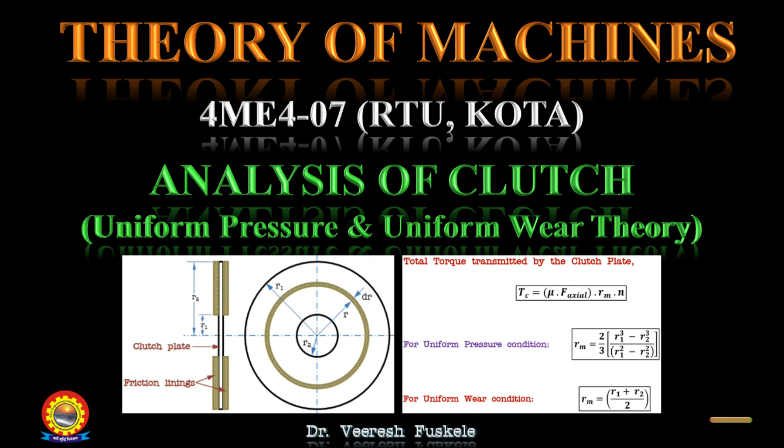As we have seen in the last video, the torque that can be transmitted by the clutch is given by mu times F axial times Rm times N, where mu is the clutch lining friction coefficient, F axial is the axial force applied on the clutch plate, which keeps the clutch plate in contact with the flywheel. Rm is the mean radius, and N is the number of friction surfaces or discs. The torque transmitted by a clutch is a function of its geometry, the magnitude of the actuating force applied, and the condition of the contact between the members.

The geometry means the dimensions: what will be the inner radius and the outer radius. The magnitude of the actuating force means the axial force applied to keep the clutch plate in contact with the flywheel. The contact prevailing between the members depends on the clutch lining friction coefficient. The applied force can keep the members together with uniform pressure all over the contact area, leading to analysis based on uniform pressure condition.

However, as time progresses, some wear takes place between the contacting members, which may alter the contact pressure, so uniform pressure condition may no longer prevail. Hence, the analysis here is based on uniform wear condition.

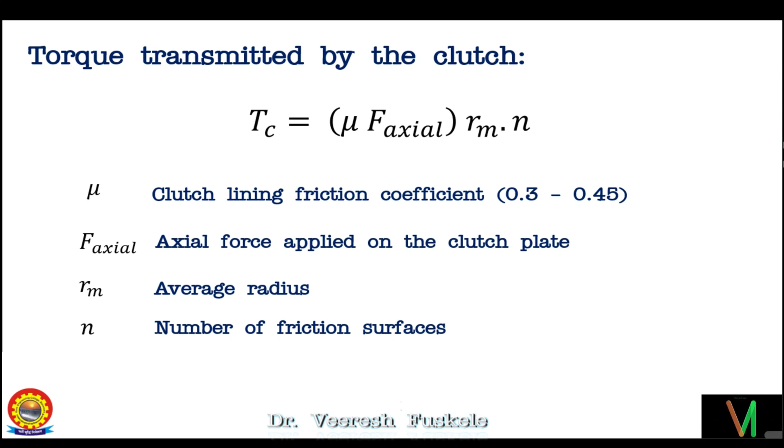Let us see the elementary analysis first. Let us consider a clutch plate with friction lining. So this is the clutch plate and these are the friction linings. This is the side view. Let us draw the front view.

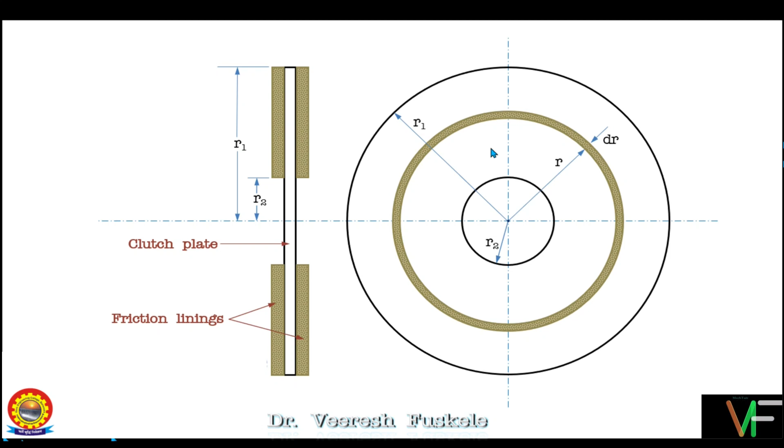This is the outer radius R1, and this is the inner radius R2. Suppose we consider an elemental circular area at radius R and of thickness dr. Then we will see the effect on this elemental circular area, and integrate for the total area of the friction lining, from R2 to R1. R1 is the external radius of the friction lining on the clutch plate, and R2 is the internal radius of the friction lining.

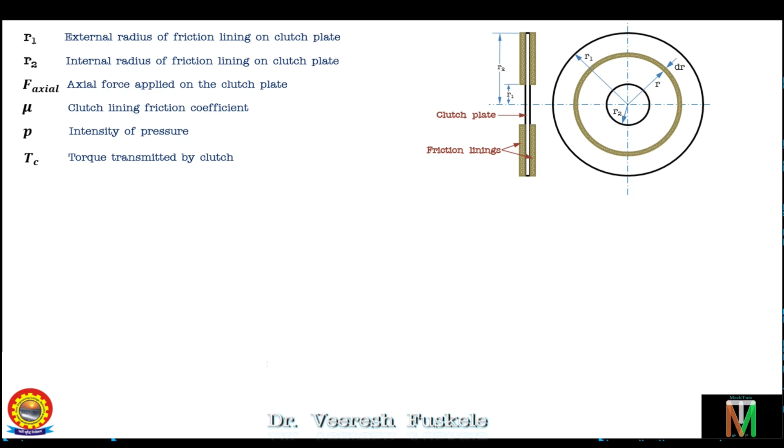F axial is the axial force applied on the clutch plate. Mu is the clutch lining coefficient of friction. P is the intensity of pressure, and Tc is the torque transmitted by the clutch. This axial force will be acting in the normal direction, applied due to the diaphragm spring, which keeps the clutch plate in contact with the flywheel during engagement. Due to that axial force, pressure will be applied on the friction linings.

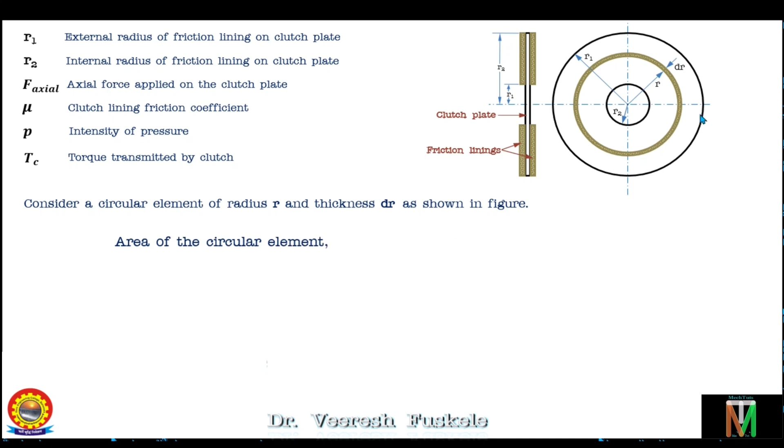Now let us consider this circular ring of radius r and thickness dr. The area of this circular ring will be 2 pi r into dr. Next, the axial force on this circular element will be area into pressure: P times 2 pi r dr. The frictional force on the circular element will be axial force into coefficient of friction, so dF equals mu P 2 pi r dr.

Now the torque transmitted by the elemental area equals the frictional force times the moment arm about the axis, which is the radius R. So the frictional torque transmitted by the circular element is dt equals mu P 2 pi r dr times R, giving dt equals mu p 2 pi r squared dr.

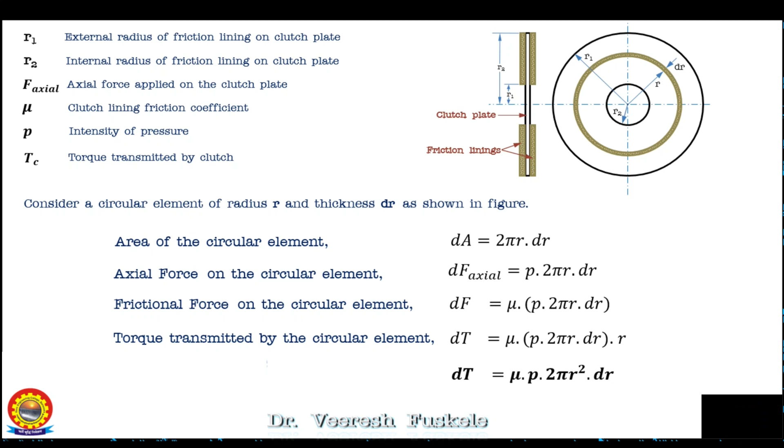Now this is the elementary analysis. Moving ahead, let us first consider the uniform pressure condition. For uniform pressure condition, the pressure at all points in the friction lining will be constant. So we can directly say pressure equals the axial force applied divided by the area of the friction lining, which is the area of the outer circle pi r1 squared minus the area of the inner circle pi r2 squared, giving the area of the friction lining.

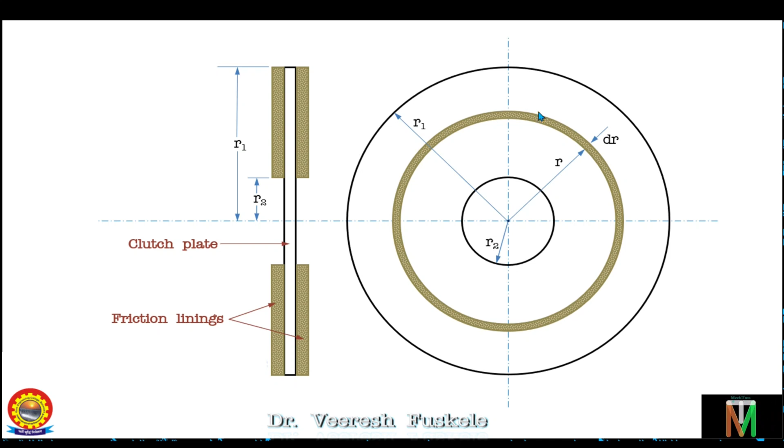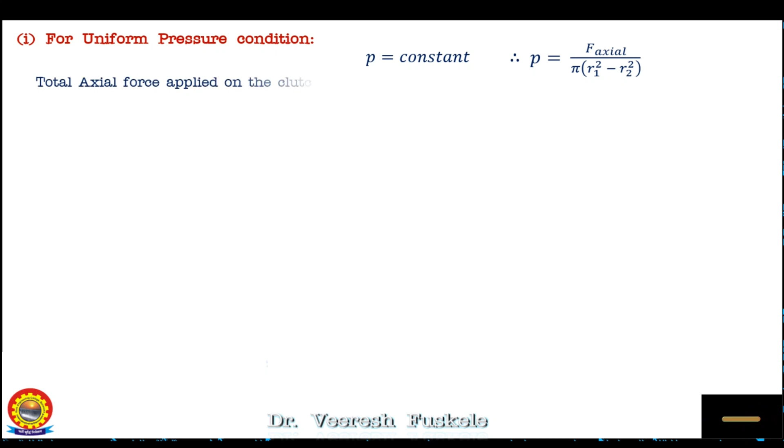Now integrating the axial force or normal force between the limits of inner radius r2 and outer radius r1, we get the actuating force needed to transmit the torque. So total axial force applied on the clutch plate is the integration from r2 to r1 of p 2 pi r dr. Since p is constant, we take it outside, giving p into 2 pi times integration from r2 to r1 of r dr, which gives r squared upon 2.

Putting the value of limits r1 and r2, we get the total axial force applied on the clutch plate as pi p r1 square minus r2 square.

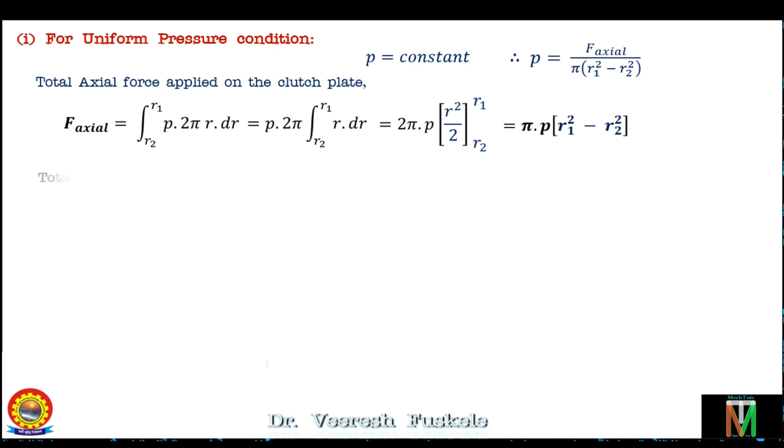Now the total torque that can be transmitted is obtained by integrating the equation of dt by the limits of inner radius r2 and outer radius r1 as follows. The total torque transmitted by the friction surface T is equal to integration from r2 to r1 of mu p 2 pi r square dr. This was the equation of dt.

2 pi mu p is constant, so it has been taken outside, and integration of r square dr will be given as r cube upon 3. Putting the values of the limits, we have the total torque transmitted by the frictional surface in case of uniform pressure condition as 2 pi mu p r1 cube minus r2 cube upon 3.

By keeping the value of p from this equation, p is equal to f axial upon pi r1 square minus r2 square, we have the total torque transmitted by the frictional surface as 2 by 3 mu f axial r1 cube minus r2 cube divided by r1 square minus r2 square.

This can be further written as the generalized equation T is equal to mu f axial into Rm, where Rm is equal to 2 by 3 R1 cube minus R2 cube divided by R1 square minus R2 square. So this is the total torque transmitted by the frictional surface.

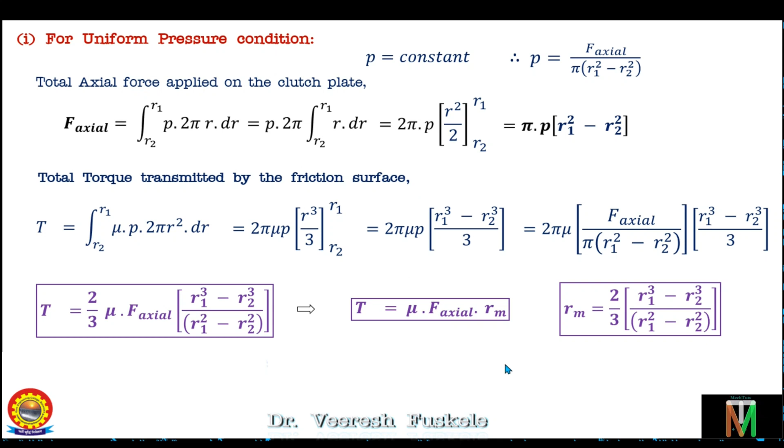Next, let us see the uniform wear theory. According to some established theories, the wear in a mechanical system is proportional to the PV factor, where P refers to the contact pressure and V is the sliding velocity.

Based on this, for a case of a plate clutch, we can state that the constant wear rate Rw is assumed to be proportional to the product of P into V. So Rw is proportional to PV, and that is constant. The velocity at the point on the face of the clutch, V is equal to R omega. Assuming constant angular velocity, we can write that P into R is a constant, suppose it is C.

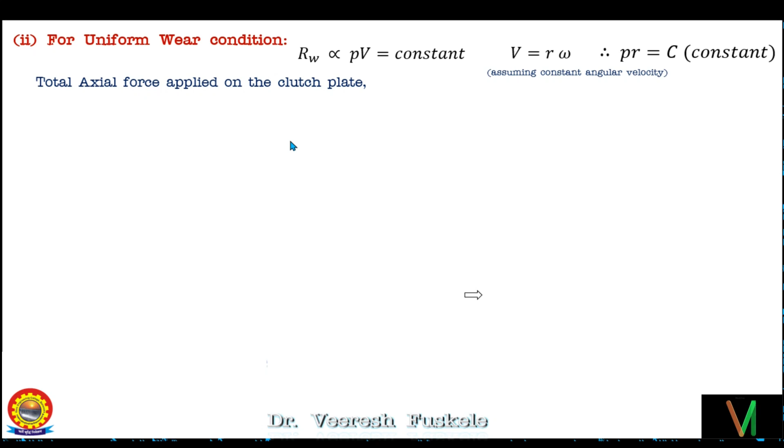Now again, the total axial force applied on the clutch plate can be calculated as before by integrating dF from the limits R2 to R1 as follows. F axial is integration of R2 to R1 of P 2 pi R dr. Now we can keep the value of P from here as C upon R, so 2 pi R dr.

Now C is constant, so we take it outside. 2 pi is constant, so we take it outside. Then R and R cancel out, so integration of dr is r in the limits r1 to r2. So we get the total axial force applied on the clutch plate as 2 pi c r1 minus r2 in case of uniform wear condition.

Next we'll find out the total torque transmitted by the frictional surface. So T is equal to integration from r2 to r1, as we have done previously, of mu p 2 pi r square dr, this is dt.

We'll keep the value of p here again, so r2 to r1 of mu c by r, 2 pi r square dr. R and r will cancel out. We'll take out 2 pi mu and c as constant, and integration of r will give us r square upon 2 in the limits r1 and r2. This will finally give us T is equal to 2 pi mu c r1 square minus r2 square upon 2.

Further, taking the value of c from the F axial equation, c will be equal to F axial divided by 2 pi r1 minus r2. Keeping the value of c here in this equation, we get the total torque transmitted by the friction surface as 2 pi mu F axial upon 2 pi r1 minus r2, into r1 square minus r2 square divided by 2.

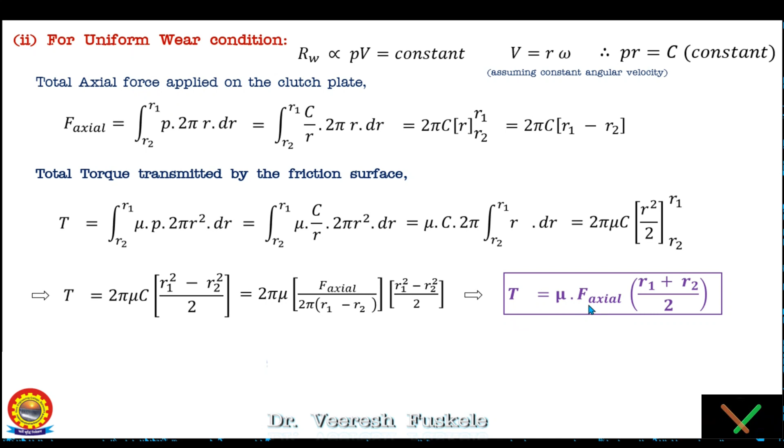So again writing this in generalized form, we have T is equal to mu F axial Rm, where Rm is equal to R1 plus R2 divided by 2. This is how we calculate the total torque transmitted by the frictional surface in case of uniform wear condition.

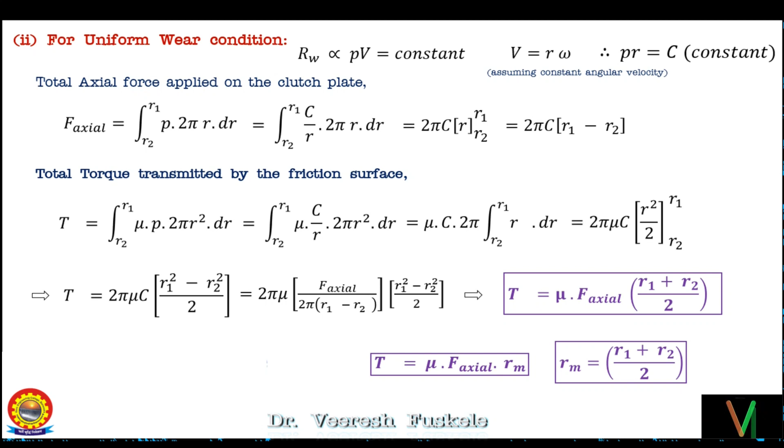Now let us find out the total torque transmitted by the clutch plate. As we have seen earlier, it is given by mu into F axial into Rm into n, where n is the number of frictional surfaces. For a single plate clutch, n will be equal to 2, and similarly for the multi-plate clutch n can be calculated.

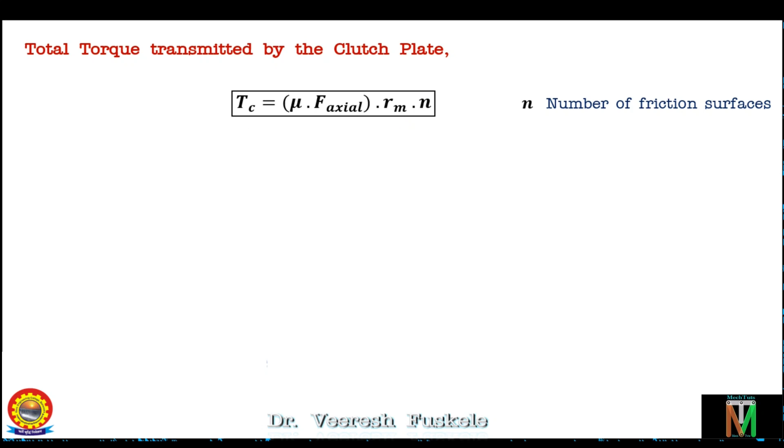This Rm equation will be the same for both conditions, uniform wear and uniform pressure, only the value of Rm will differ. In uniform pressure condition, Rm is 2 by 3 R1 cube minus R2 cube divided by R1 square minus R2 square, as derived earlier. Similarly for uniform wear condition, Rm is R1 plus R2 by 2. So this is how we find the total torque transmitted by the clutch in both conditions.

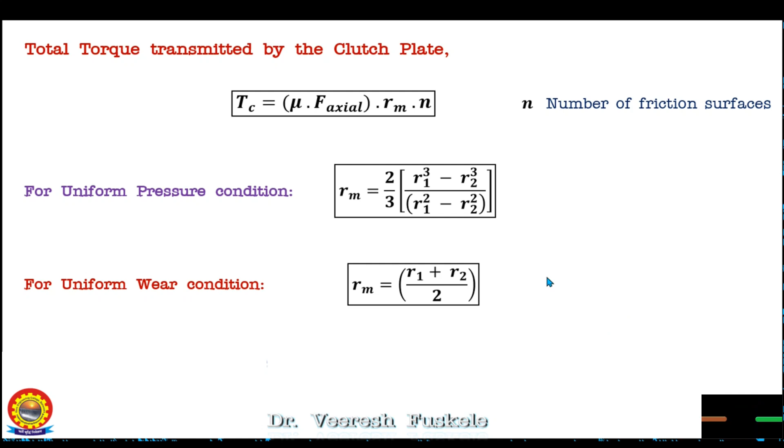I hope you have understood the derivation, and in the next lecture we will apply these equations to solve a numerical problem. Thank you.